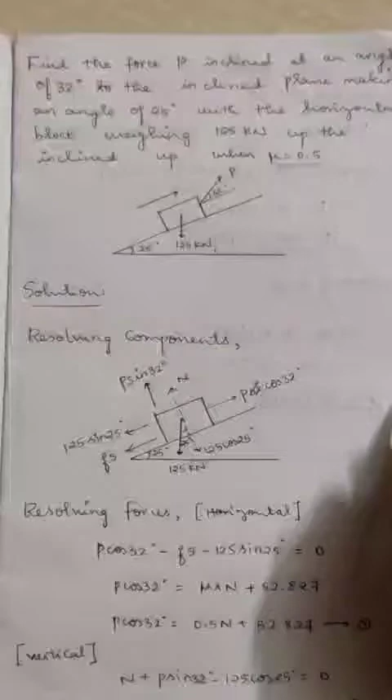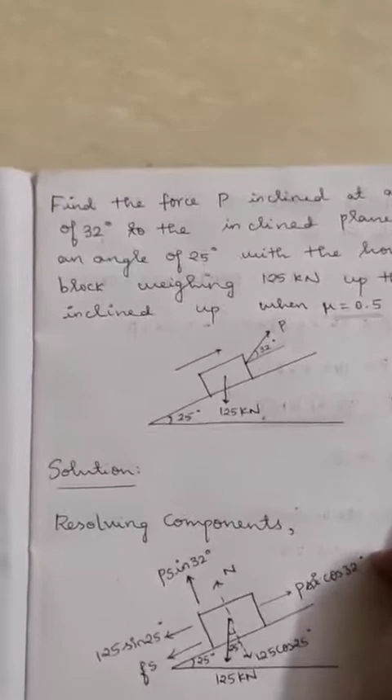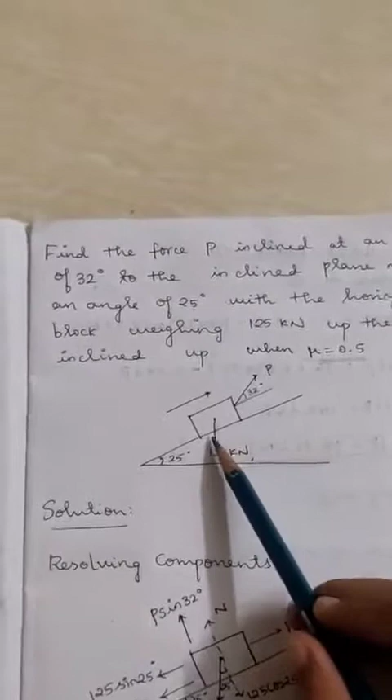Today we will be seeing a sum on the topic of an object on an inclined plane with some friction on it. Let me read out the question first: find the force P, inclined at an angle of 32 degrees with the plane, which itself makes an angle of 25 degrees with the horizontal, pulling the block weighing 125 kilonewton up the inclined plane, when the coefficient of friction between the block and the surface is 0.5.

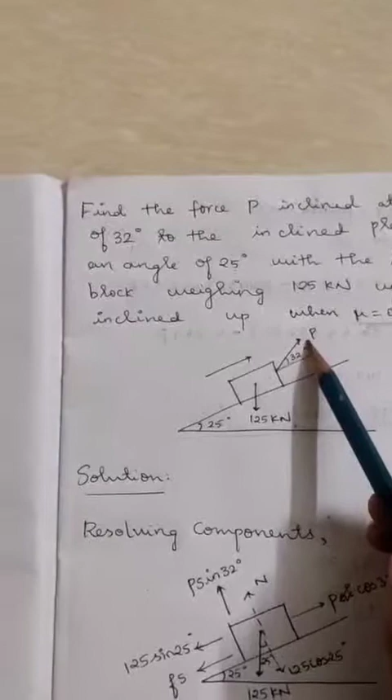So we have to find the force P with which the object is pulled upwards the inclined plane, when the plane is inclined at an angle of 25 degrees from the surface. Now let's move on to the solution.

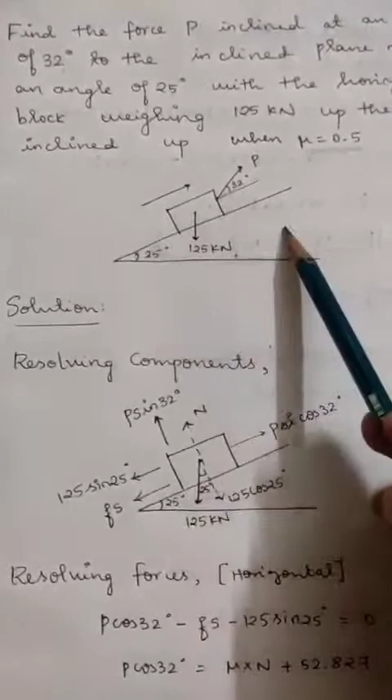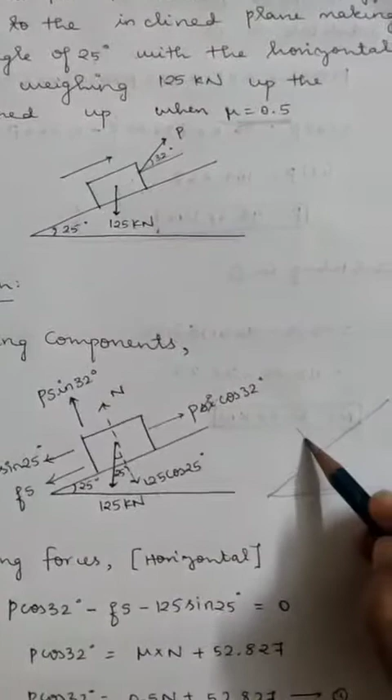Upon resolving the forces, the final diagram will come out like this. Let me resolve it and show it to you once again. Let's consider the horizontal and the inclined plane, and consider the object like this. They have mentioned that the weight of the object is 125 kilonewton, and it's inclined at an angle of 25 degrees.

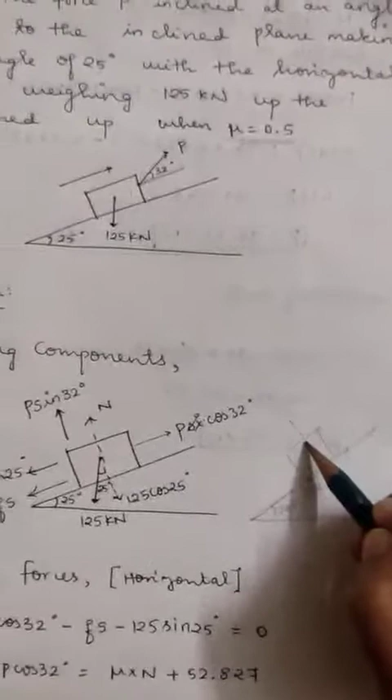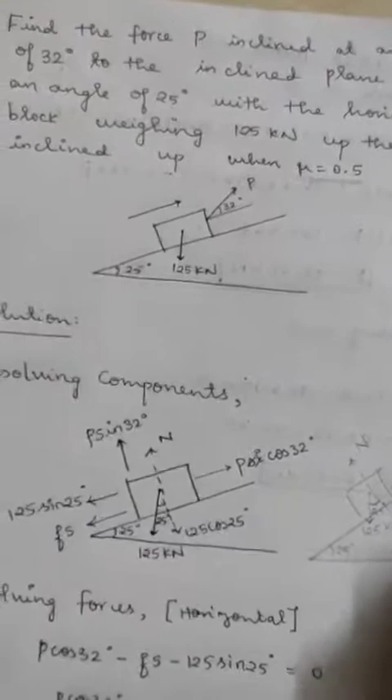Upon resolving, we will get the same angle of 25 degrees here. This will be the normal force, acting perpendicular to the surface and the body, and this will be the vertical component of mg, that is 125 cos 25 degrees. Now, as we are given P, it also has some angle, so there will be both horizontal and vertical components of the force with which the object is being pulled upwards.

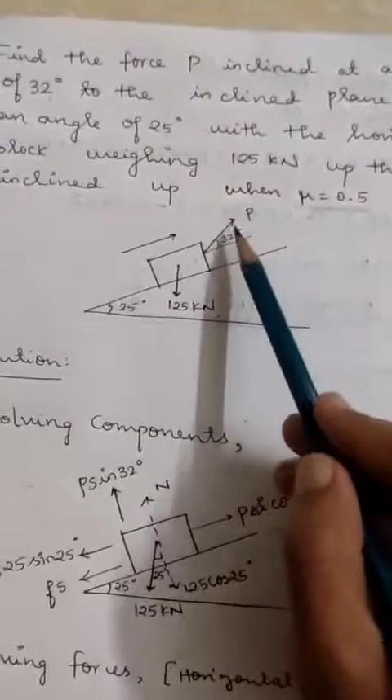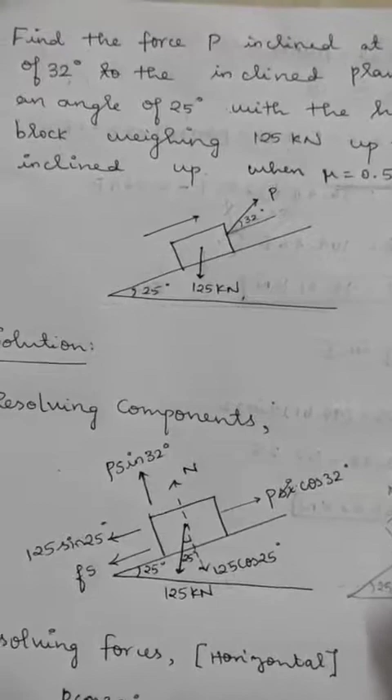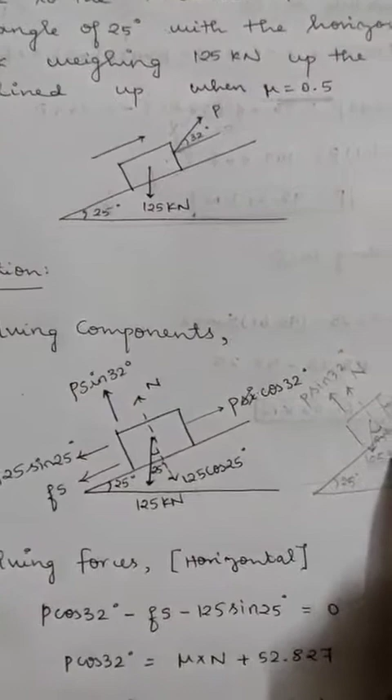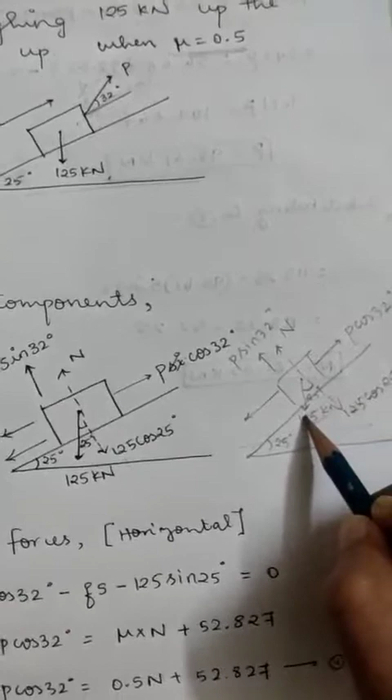When we resolve it, we get P cos 32 in the horizontal direction and P sin 32 in the vertical direction. Now what's remaining? We have resolved the vertical component of the 125 kilonewtons, but its horizontal component is still remaining. If the angle is 25, then in the opposite direction it will act like this, so we write it as 125 sin 25 degrees.

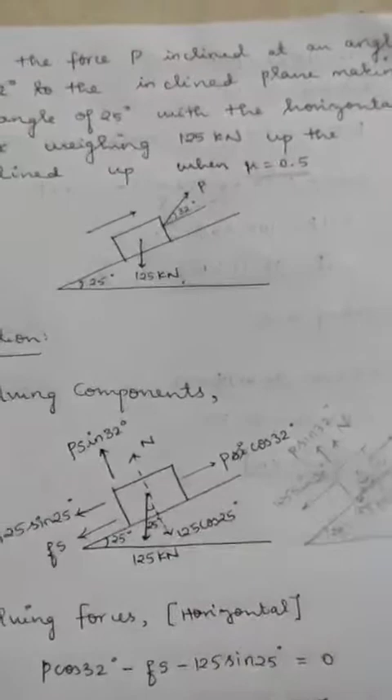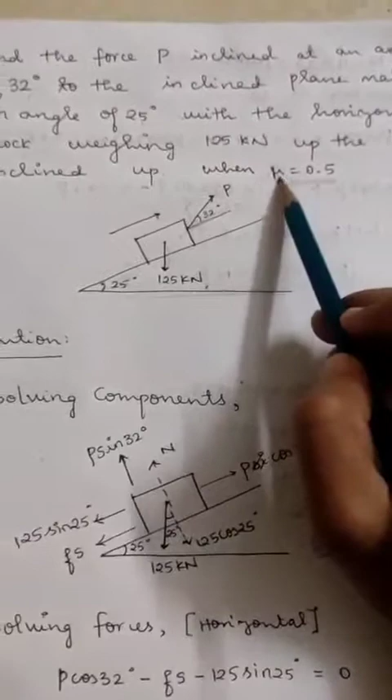Whenever an object moves on a rough surface, there will always be a frictional force acting on it, opposite to the direction the object moves. So we should consider a frictional force Fs here, and we are already given the coefficient of friction as 0.5 in this case. Now let's move on to the calculation part.

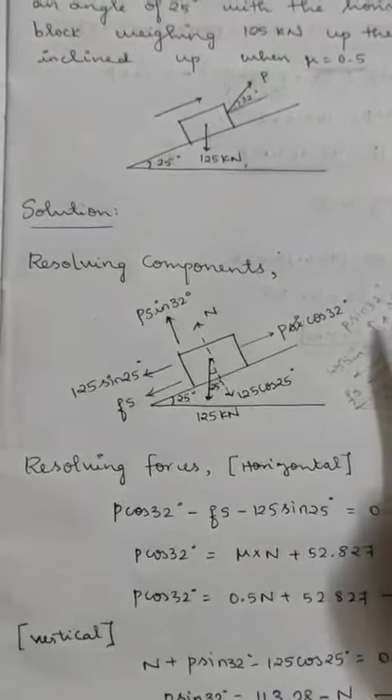First we have to solve both cases, the forces in the horizontal direction as well as the vertical direction. This will give us two equations, and upon solving them we will get the required force with which the object is being pulled up the inclined plane. Now let's take the horizontal case.

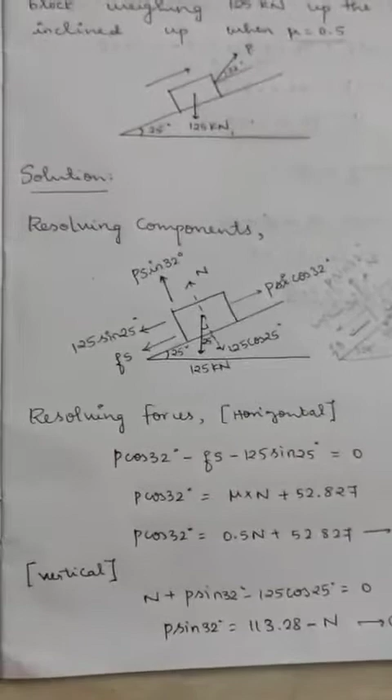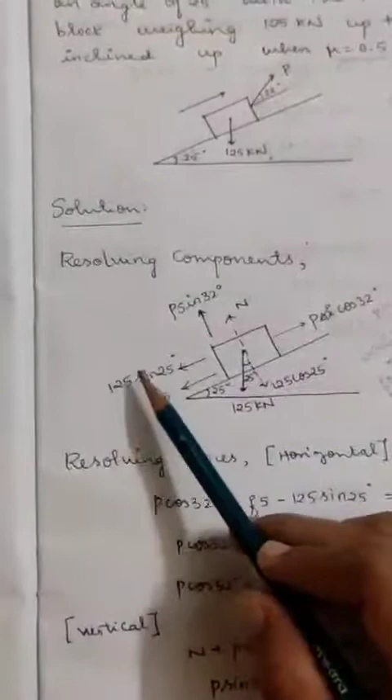Taking the horizontal forces acting on the object, we get P cos 32 acting in the rightward direction, and 125 sin 25 along with the frictional force acting opposite to it. So we get an equation like this, and upon equating it, we set it to 0.

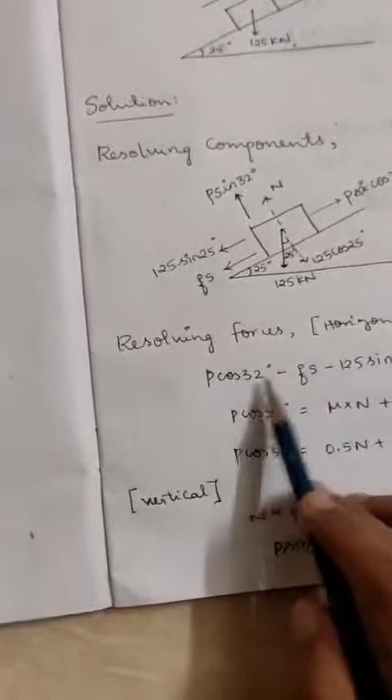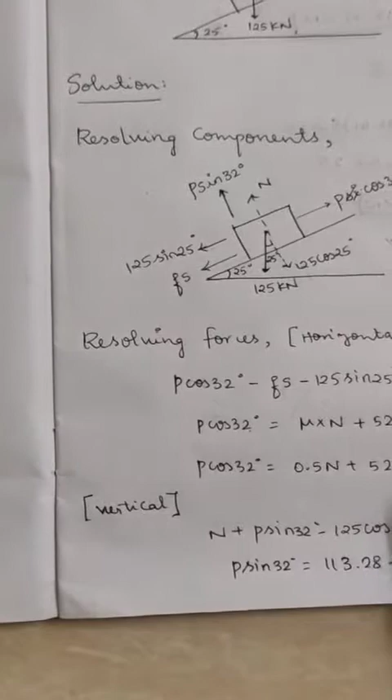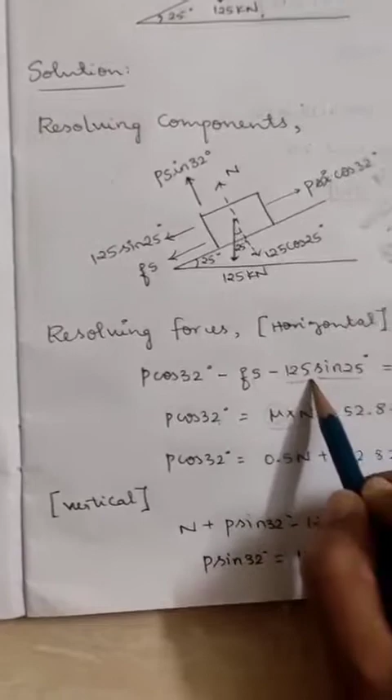Upon solving, we keep P cos 32 as such, and for the frictional force we use the formula: frictional force equals coefficient of friction into the normal force acting upon it. So we write coefficient of friction into the normal force, plus sin 25 into 125, which gives us 52.827.

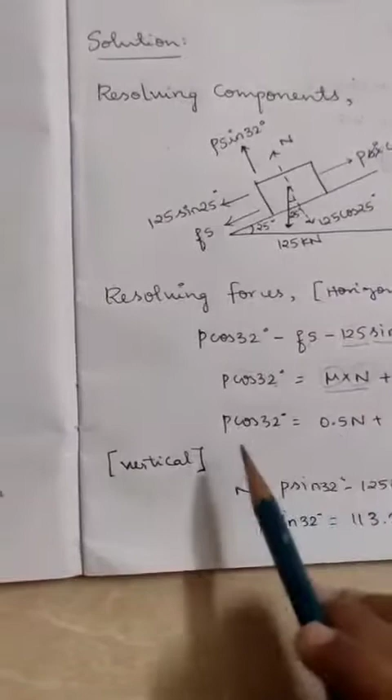We already know from the question that the coefficient of friction between the block and the surface is 0.5, so I substitute it here. We get the equation: P cos 32 degrees equals 0.5 N plus 52.827. So our first equation is done, solved by taking the horizontal forces.

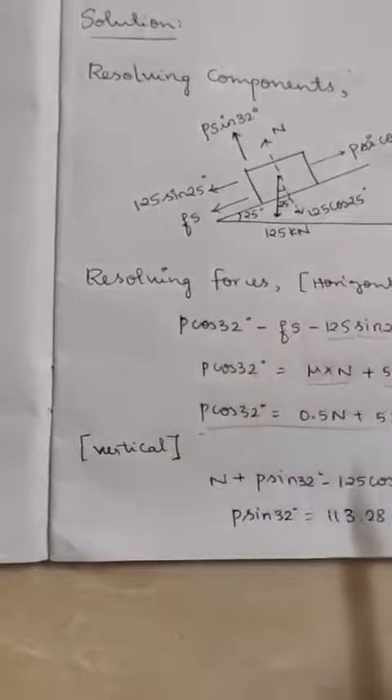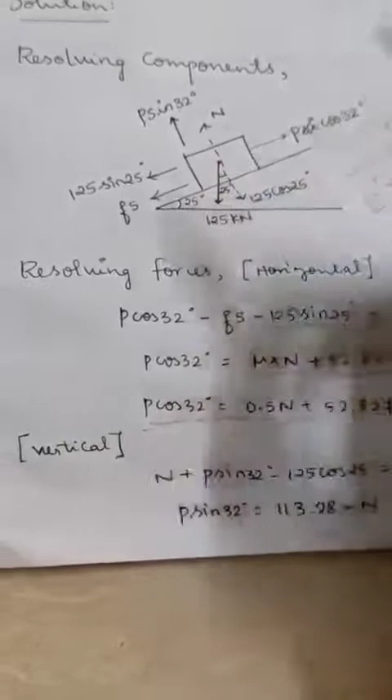Now we will form another equation by considering the vertical forces acting on the object. We get: normal force plus P sin 32 equals the opposite force acting in the downward direction, that is 125 cos 25 degrees, which is the vertical component of the weight. We set that equal to 0.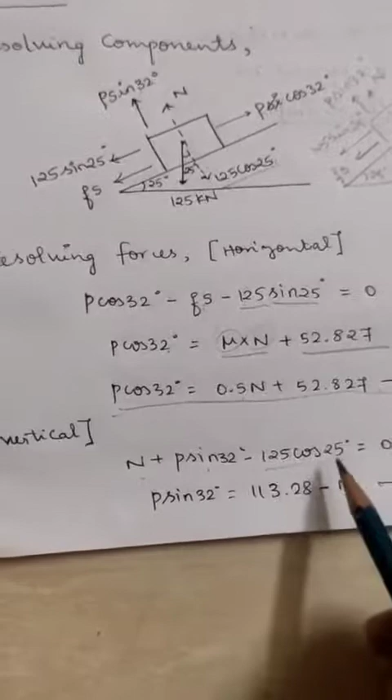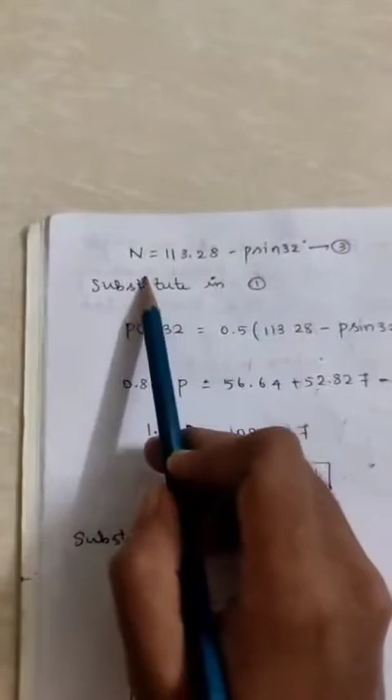Upon solving similarly as before, 125 cos 25 equals 113.28. Upon rearranging, we get an equation like this. Now we take N from this second equation and keep P aside, then substitute this into the first equation, that is P cos 32 equals 0.5 N plus 52.827.

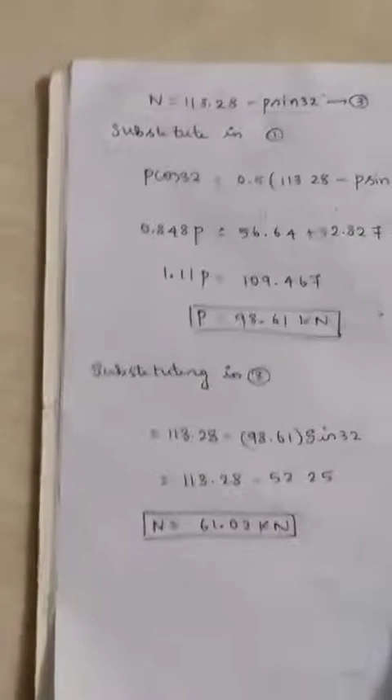Upon substituting and solving, we get the final answer for P, the force with which the object is being pulled, as approximately 98.61 kilonewton. Then, substituting back into the same equation, we can also find the normal force, which is not asked in the question, but it's good to find it anyway.

So this is how the sum is carried out, and this is how we find the answer. I hope everyone got it, and have a good day.